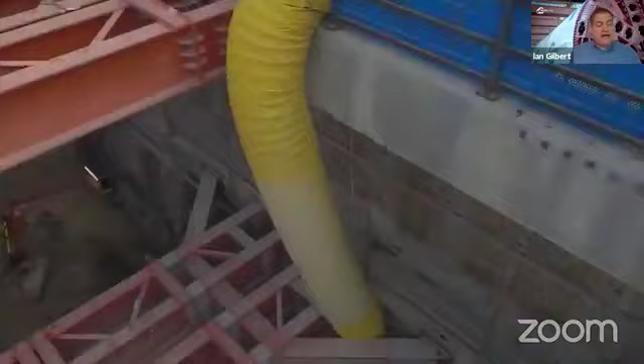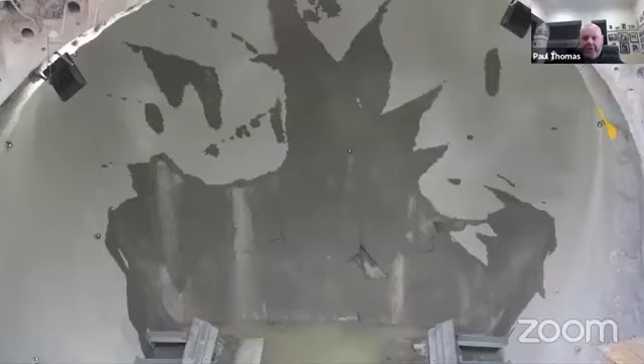So Paul, we've got some great footage of these breakthroughs that I've just mentioned, and we're going to try and share that with the viewers. And it'd be great if you could just talk us through what's happening here. This is the South Yarra breakthrough with TBM Millie, named after Millie Peacock, the first female MP in the Victorian Parliament. So tell us what's happening here. So yeah, we can see the TBM breaking through at the eastern portal down at South Yarra, and what you can see in front of you here is a bit of a time lapse.

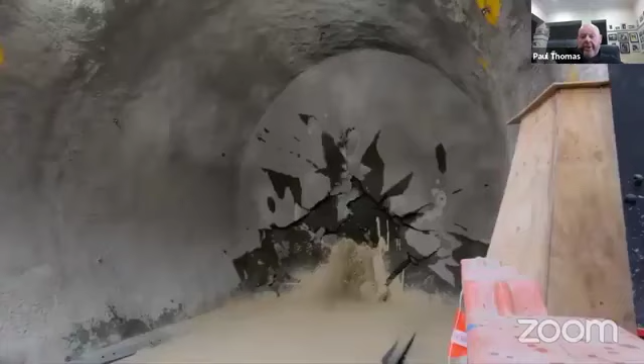But then you can see the liquid coming from what we call a stub tunnel. The stub tunnel is basically a reception chamber to allow the TBM to come through in a safe and controlled manner. Also at South Yarra, we got some shallow ground and a bit of a mixed ground condition. So this provides some additional support to the surrounding infrastructure. You can see at the top of the stub tunnel some round tubes, which we call canopy tubes, which provide an umbrella support, again, to help provide some initial support to the excavation.

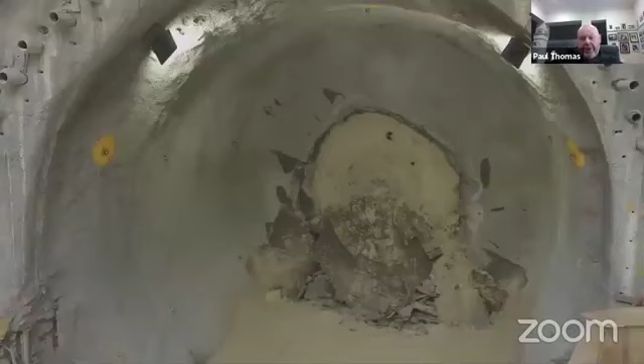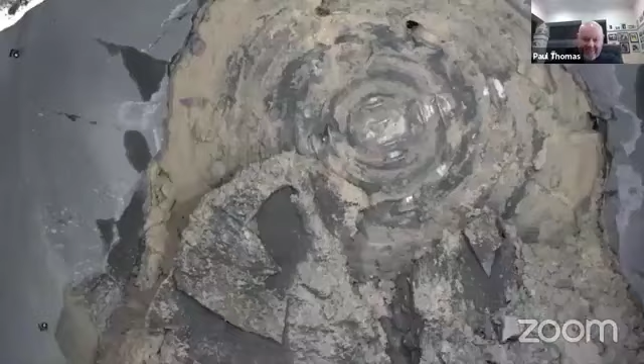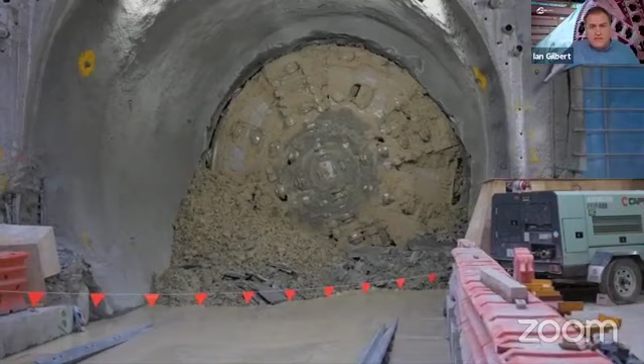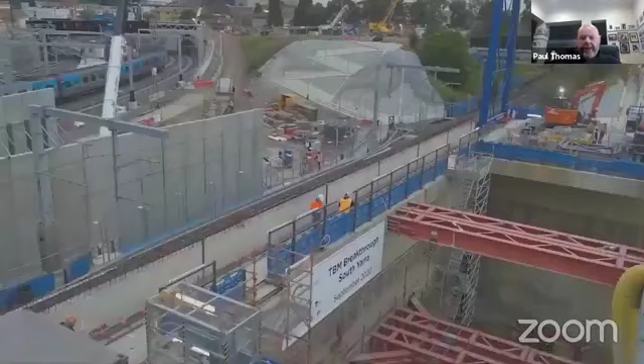Paul, I'm just going to jump in there. Tell us what it's like when you're actually down the shaft looking at one of these things. You know, is it incredibly noisy? Is it hot? Is the steam coming off the TBM? Not quite like that, Ian. It's a controlled environment. So again, you probably notice in the shaft there's lots of pipe work within the shaft. That provides ventilation for the crews working within the shaft. There's plenty of light in, so the atmospheric conditions are quite favorable.

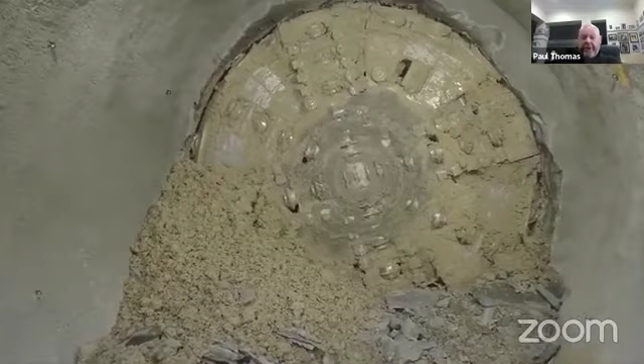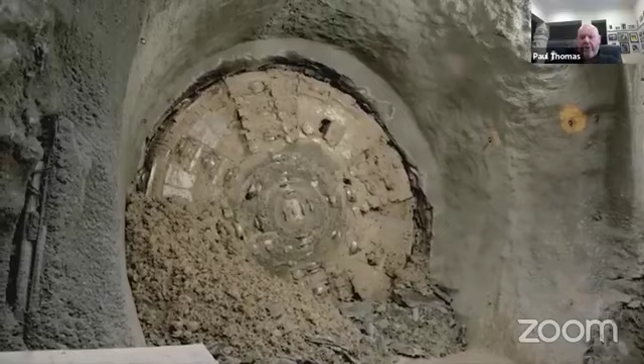Obviously, there's a bit of liquid you can see there, which is the slurry fluid that's used in a slurry machine that comes through. These are pressurized machines, but the pressure is lowered as you break through. And of course, as it's cutting through concrete piles and shotcrete, there is some noise associated with that, and there's some vibration associated with that as well. But nothing untoward that's really noticeable.

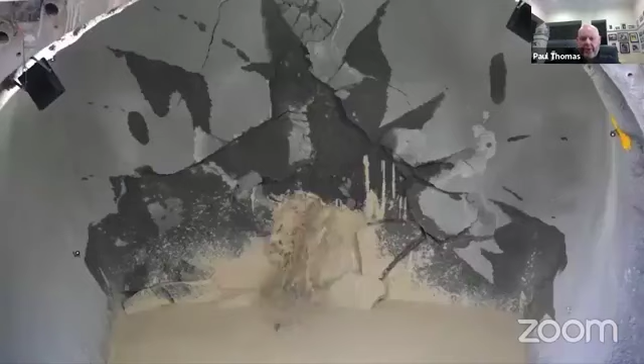So this will be the key point you can see in the picture here, just as it starts to push through. And the crews give that TBM the final push just as the shotcrete comes down, and so it's a bit like ice cracking. Once you've got the ice starting to crack, the rest follows on with a lesser effort, so to speak.

Okay, now Paul, I think I might just try and stop the video there, because we're starting to get plenty of questions coming through, and we can come back to some of that footage. I'm going to tie two questions up here. What's the biggest challenge that's faced on the Metro Tunnel with the tunnelling? And that's from Brendan Elliott. And then we have another one from Damien Coop. Has there been any blasting needed on this project, or is it all done with road headers and TBMs?

Two very good questions. So in answer to the first question, there's significant challenges on a day-to-day basis. The success of this project, of course, involves the TBMs, it involves road headers, but it involves logistics. This is a logistical challenge. It's a wide geographical spread of the project, 9 kilometers end to end, 5 stations. So the logistics and the support involved in servicing the works is very, very important, considering we're in the CBDs and other urban conurbations.

The second challenge is obviously ground conditions. Here in Melbourne, we do face variable ground conditions, and I think down at the Yarra River is probably the more challenging of ground conditions, as we tunnel underneath the Yarra River and Princes Bridge, which is the last of our tunnel drives. And here under the river, in approximately 550 meters of the last tunneling drives, we probably encounter about 7 different geotechnical interfaces. Interfaces meaning it comprises of softer soils, hard rocks, boulder material, sandy material.

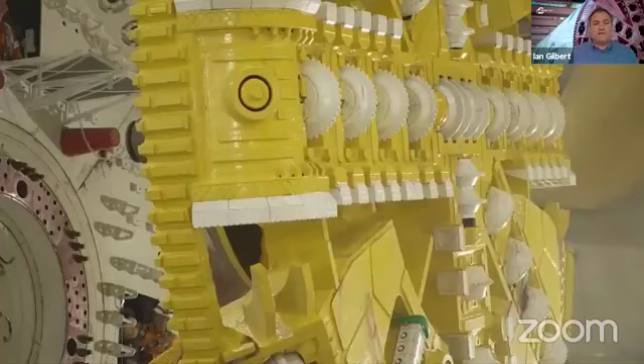It's an excellent question here from Gary Buck. Do the TBMs change directions, the cutter heads, clockwise or counterclockwise? And by the way, the cutter head is that thing you can see behind me on this virtual background for the viewers. The cutter head is the business end. So do they go clockwise and anti-clockwise? They can be bidirectional, that's correct, yeah. So both ways the TBM head can rotate.

And is there a reason for that, to stop them getting stuck or something like that? There's various reasons. One is to make sure that it's even in terms of cutting. The cutter wheels are not in your picture behind, but it does allow the cutter wheels to rotate in different directions, which helps with wear and tear also.

Okay, excellent. Now, a question from Brian Lewis. How consistent has the geology been? You touched on that just now.

But you might want to elaborate on that, particularly the Melbourne formation, for those who aren't familiar with such a thing. So from Brian Lewis, how consistent has the geology been, and found anything unexpected? Oh, excellent question. So look, I'm pleased to say that we haven't really found anything unexpected yet, just bearing in mind that we're only 50% of the way through. And what's been really

encouraging from my point of view is the very early geotechnical investigation works we've done, meaning that we put some vertical drills in the ground at periodic spacings and checked the ground conditions along the alignment. And in particular, we were very interested in the Melbourne formation near the Yarra River, where we expected to find some fault and dike zones. In other words, areas that would be comprised of softer and more permeable material where water might have been a

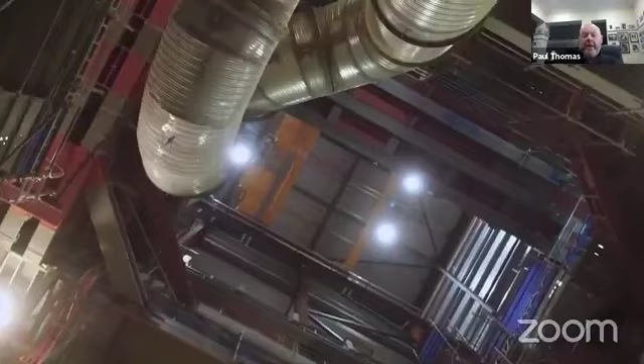In other words, we thought they would be a much poorer geotechnical matrix. We thought they might be more weathered, but as a matter of fact, they've been more cohesive, so to speak. It's been a much tighter matrix, which has meant that from a ground support point of view and from an excavation point of view, that's been more favorable for us.

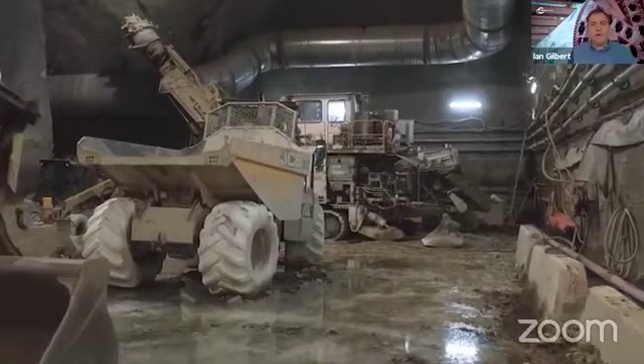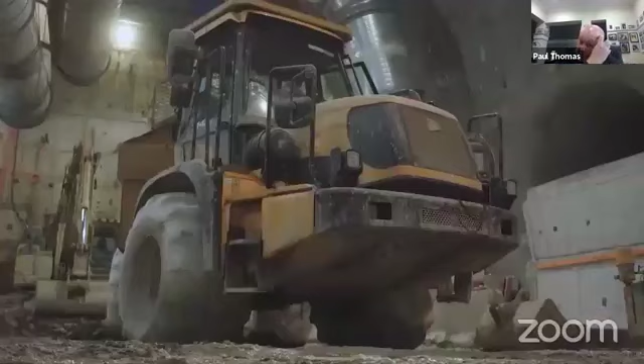Okay, and Paul, we've got some footage here. You might be able to talk us through what we're seeing here in one of the caverns. Yep, so that's good timing. So we are underground here at one of the CBD caverns. I think this is actually CBD North. And we can see in the picture here at the back, there's a shaft. This is actually at CBD South, sorry.

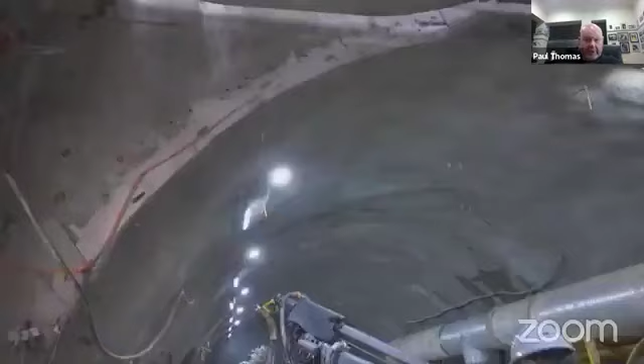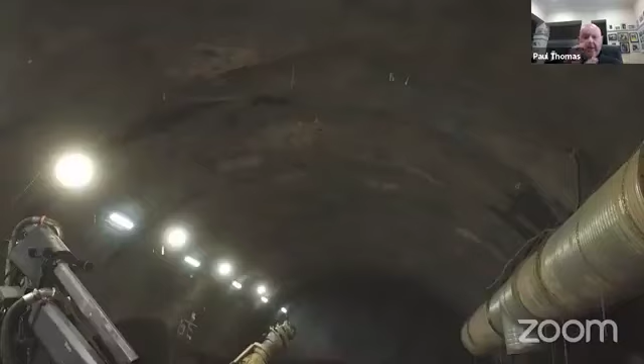So this is the road header here, and these weigh about 100 ton plus, and that's what we use for the excavation works. You can see the rock bolting rig there. And again, in the background, you can see excavators, again, another rock bolting rig. There's the cutter head on the road header there, which actually cuts and mills away at the rock. And you can see the arch profiles there of the caverns and the adit.

So this is the central part. This is actually an adit going towards Federation Square and underneath Swanston Street and Flinders Street. So again, yeah, sorry, Ian, go on. No, so to clarify, the road headers are being used for those caverns, those station caverns. That's right. In the CBD for what will be State Library Station and Town Hall Station. That's correct, Ian, yes. And then the TBMs for our twin 9-kilometre tunnels.

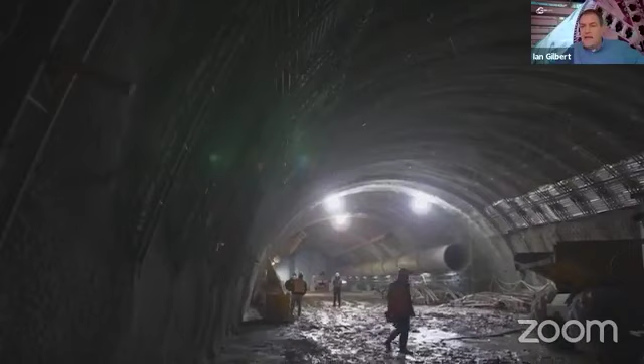And we've had a great question from Denzel Whitfield. What will we do with the TBMs when they're finished? Oh yes, good question. So look, with the TBMs, nowadays there's obviously a great deal of focus on sustainability and reuse, which is obviously a very good thing.

So in the case of Metro Tunnel, and if you look at the picture behind Ian, the white steel rings there are what we refer to as the TBM shield. So all the workings of the TBMs are contained within those shields there. When the TBMs arrive and conclude their excavation works at the CBD station, CBD South, Town Hall area, the shields themselves are left in, and we call these sacrificial shields, and they stay in place, and eventually they are cast in concrete and form part of the permanent works ultimately.

But the other components, such as the cutter head, the cutter wheels, and all the hydraulic motors, for instance, the segment erector, the refuge chambers that are on the TBMs, these are more likely to get repurposed and reused on other TBMs. So our supplier Herrenknecht has a very good strategy in place to reuse and refurbish as much of the material as possible. So they do buy back a lot of these elements.

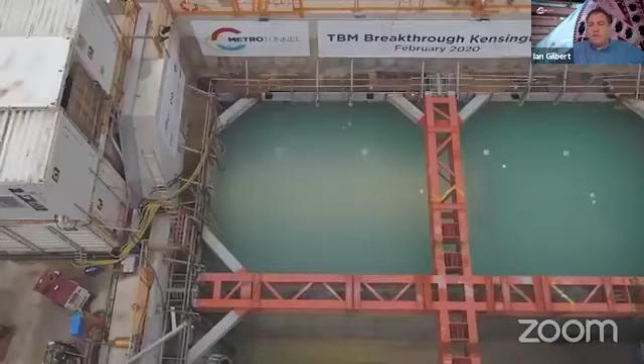Excellent, excellent. Now, I think we've got some good footage of one of our TBMs breaking through at Kensington, where we had to break through into a water chamber. We'll try and get that footage up while we just answer a couple more of these questions, because we're sort of sticking with the TBM and the business end of TBMs at the moment. Simon Mullins asks, do those cutter heads need sharpening after a run?

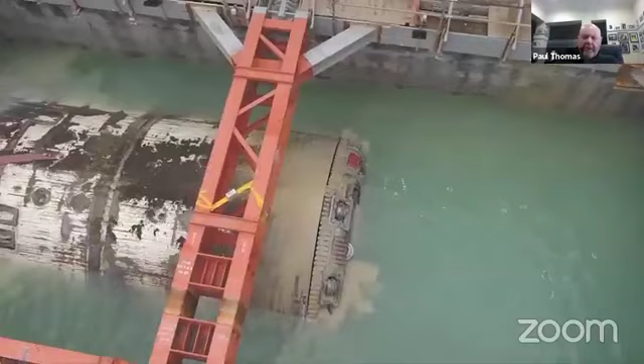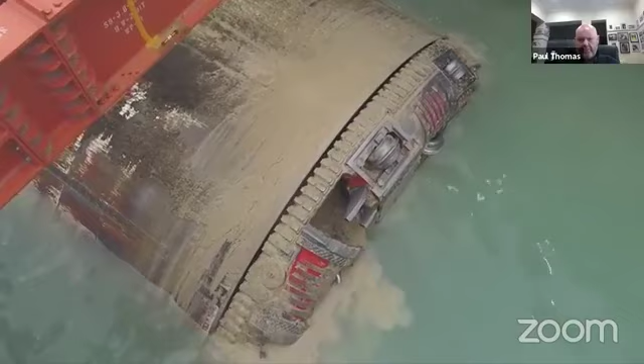No, the cutter heads don't, but the cutter tools, and again, we refer to them as cutter rings, they do get regularly replaced. So it's a bit like, I suppose, wheels on a car. They get put in different locations. And if you can see the picture here, you can see the cutter rings there, which are square shaped, and they've got the rings there. So these tools can be replaced, and they are replaced.

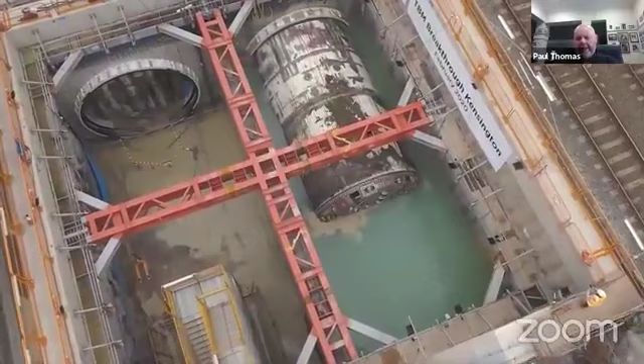They're taken out from the back of the cutter head within the shield, and the cutter rings and the cutter bearings do often get replaced depending on wear and tear, but the cutter head itself generally is okay. Once it's achieved a breakthrough, obviously there's an inspection, and if any what we call hard facing is required to the cutter head itself to patch up any areas, so to speak, then that maintenance is undertaken.

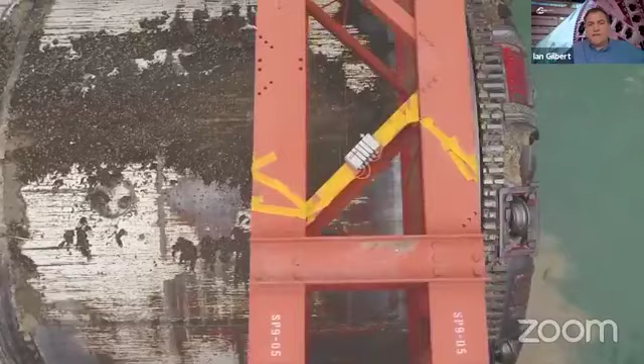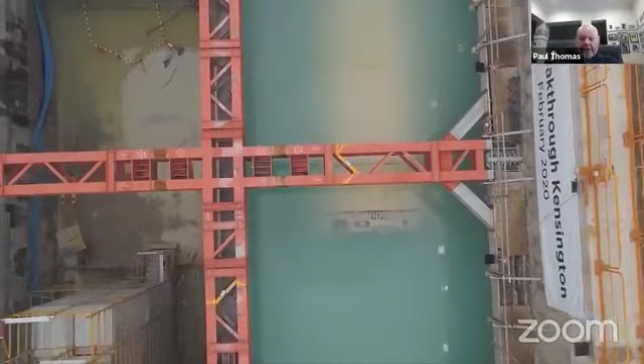And can you explain to us why that TBM was coming through into a water-filled shaft that we can see here? Yeah, good question, Ian. So if we just cast our minds back to about 10 minutes ago, where we saw the eastern portal shaft, which was a dry shaft, no water in the shaft. There's two differences between the western portal and the eastern portal. Here we are very close to existing rail infrastructure, and there's also some services close to this shaft.

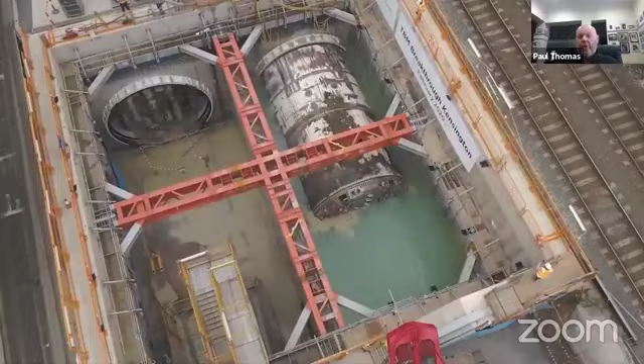Normally, instead of filling a shaft with water, you can provide ground treatment to the external of the shaft. So you provide a ground treated zone, so to speak, for the TBM to dock into, and then finally breaking into a shaft. And that means that the ground and the groundwater table is not compromised outside the shaft.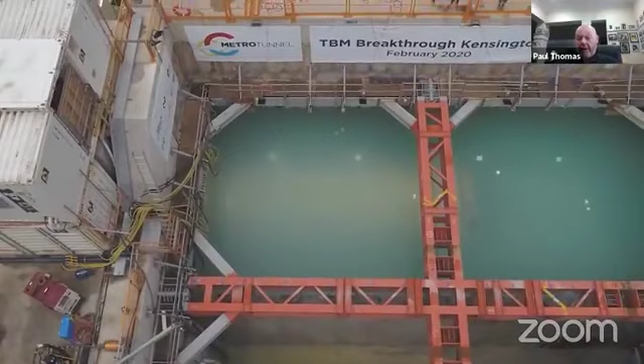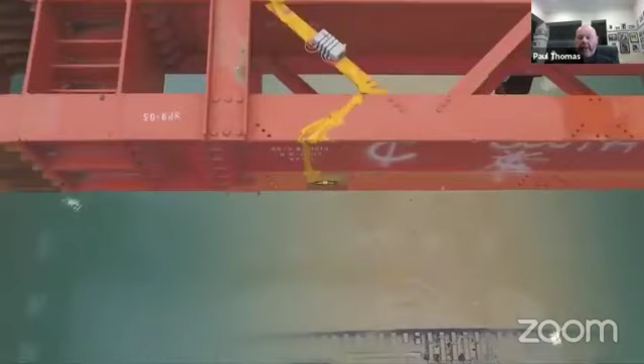However, in the case of the western portal shaft, due to space, there wasn't an opportunity to perform ground treatment. So in order to maintain the equilibrium of the groundwater outside, we fill the shaft full of water, so it maintains the balance. If the groundwater was to be drawn down, that could have ended up in some surface settlement, which we don't really want. So again, it's balancing the groundwater levels in this area to a great deal of success.

All right, we've got another question. What are the cutter heads made of? Diamonds? Presumably it's got to be something pretty hard. Yeah, no, Herrenknecht, our supplier, generally keeps this a secret in terms of what the composition is, but I've been fortunate enough to visit Herrenknecht's factory in Schwanau in Germany, where they make the bearings and the cutter heads. So it's a very, very hard, robust material, and certainly can stand the wear and tear of very hard rock conditions, as well as the cutter tools. The composition of the cutter tools is very, very important. But it's a trade secret, right? So there's your answer. It's a trade secret, yeah.

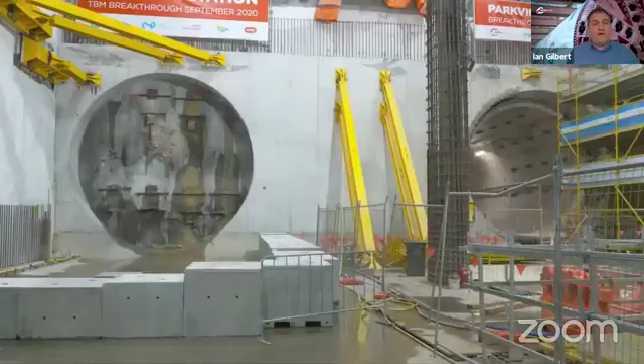So I think we've got some more TBM footage, because it seems like we've got a lot of interest in the business end of these TBMs. So we might be able to get up some footage of TBM Meg breaking through at Parkville. All five are very important stations for us, but Parkville obviously opens up that whole medicine, education and research precinct when the Metro Tunnel finishes in 2025. So a lot of focus on Parkville. Paul, tell us what's happening at this one.

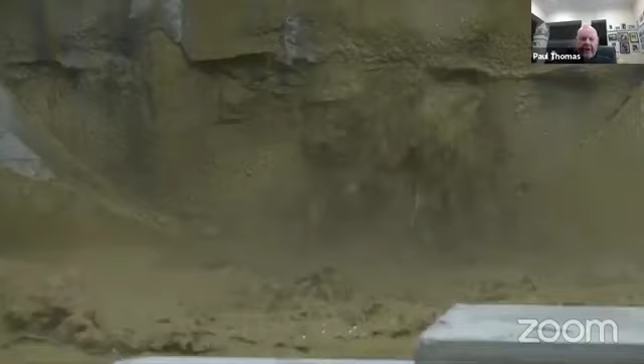So again, what we can see here is a breakthrough that's similar to the Eastern Portal, except we don't have any reception chamber. It's not required. Parkville itself and the surrounding environment has got very good rock conditions. We don't have any prevailing groundwater issues, meaning that we can allow the groundwater to drain in, so to speak, because there's no softer compressible material at the surface.

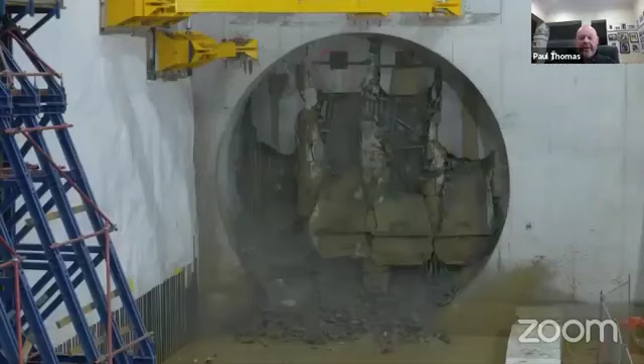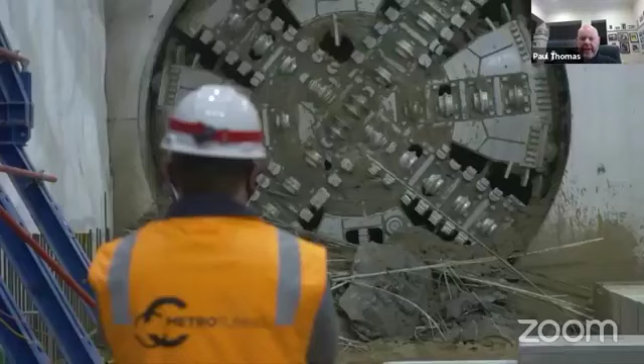And that's a good shot, because you can just see the TBM breaking through the bored piles, which we use to form the outside of the box. And that is not steel reinforcement, that is glass fiber reinforcement. The reason we use glass fiber reinforcement is that the steel could cause damage to the cutter head and the slurry pumps. So with glass fiber, it's easily cut and chomped away, so to speak.

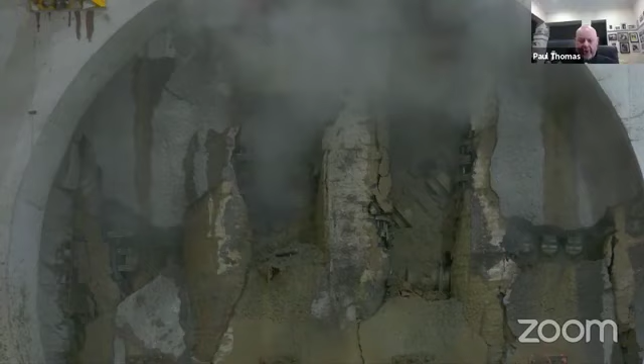The yellow steel section you can see there is akin to strutting. That provides lateral restraint against the head wall there, because the TBM at this stage is pushing quite hard to cut through the bored piles and the shotcrete there. Probably pushing at about 1,500 to 2,000 tons. So there's a lot of force, a lot of energy being applied here to break through the wall. Could you compare that to anything? The force you're talking about, can you put that into layman's terms?

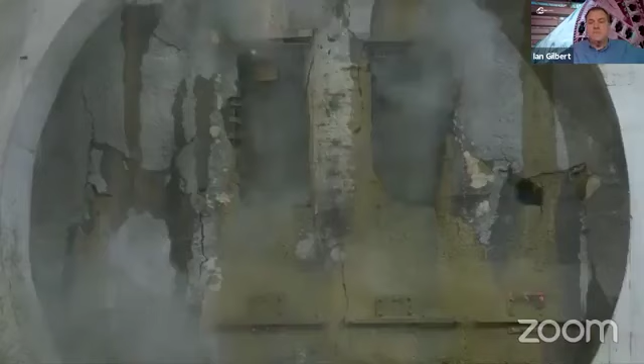Maybe trying to, well, trying to pull or push a couple of 747s. I'll put you on the spot there. You called me out.

Now, how often do the cutter heads need to be changed? asks Brendan Elliott. The cutter heads themselves don't have to be changed unless there is a major problem during the tunneling works, which is a low risk. But again, as I said, the cutter tools themselves, as we've seen, that are affixed on the cutter head, the round turning tools, get changed periodically at maintenance points. So again, that's the most common item that gets replaced and rechanged.

Okay. Now we've got a question about the tunnel itself as opposed to the tunnel boring machine. Ethan Rosario has asked, what carries the concrete tunnel lining in the TBM? So obviously those TBMs, they go through, they dig out the tunnel, but then they line the tunnel as they go to create the finished tunnel. Correct. How do those huge bits of concrete get out there?

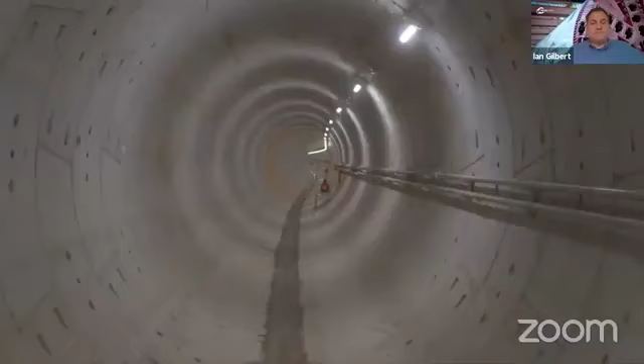Right, well, this is a good video, and I've also got a TBM model here I might refer to. But this is the tunnel here where obviously the segments have been installed and the TBMs have been taken away, and also all the TBM services have been taken away. So this is not quite the finished product. There's still cross passages and first stage concrete to be installed.

But in order to get the segments to the TBM while it's building the tunnel, we use what are called MSVs, which are multi-service vehicles, which are rubber-tired vehicles. They can drive in and they can drive out. So there's drivers' cabs front and rear of the MSVs, and they basically bring the segments up to the TBM.

And if I refer to my little model here, this model is an EPB, it's not a slurry machine, but this is where the segments will be installed in this area. This is what we call the ring build area here. And if you can just see my model, there's some segments here which have been delivered. So the MSV would come up.

There's a gantry crane then on the back of the TBMs, which actually lifts the segments which form the ring, brings them into the ring build area, and they're moved along here by a gantry system into the segment ring build area, where they'd install them within what we call the tail skin of the TBM. Then once that full segment ring is installed, the TBM pushes off there and recommences the cycle.

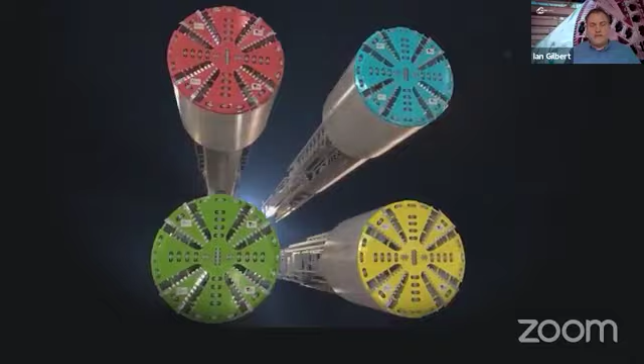Okay, excellent. Now we've had a few questions about cross passages. So I'm just saying that so our video supremo can get that ready. Oh, there you go. Speak and it shall be done.

Now, Paul, tell us about what a cross passage is. We're getting some questions about what exactly that is. Okay, well, the cross passage, in very simple terms, connects both parallel tunnels together. The purpose of the cross passages is to provide emergency egress and access during the operational phase, in the event that something occurs within the tunnel. If the train was to break down or passengers need to evacuate safely, they can be directed from the train onto a walkway to the nearest cross passage.

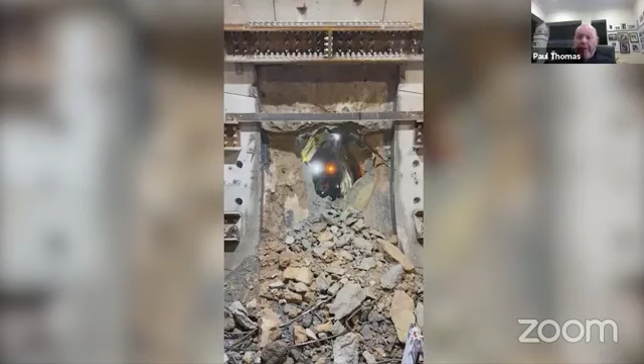Now, the cross passages here are spaced every 244 meters. And not only do they provide emergency access and egress, but they also house some of the key communications equipment required to operate the trains, such as telecommunication equipment. Some of the cross passages, I think we've got 3 or 4, have sump pits. So there's small pump stations, so to speak, within the cross passages.

So we've got water running through. For instance, if there was a water ingress into the tunnel for whatever reason, the low point of the tunnel where the cross passage is has a deep sump pit, and that pump will pump the water out of the tunnel. So there's a number of uses for the cross passage.

Got you. Our next question, I would say this viewer is very much an engineer. Alexander Ilievsky: how do you get the TBM precisely lined up with the recessed diameter in the tympanum wall when they break through? Oh, okay, that is a good question. So there is quite a sophisticated guidance system used for the design tunnel alignment. The TBM guidance system is controlled by automatic theodolite stations and laser beams, which help keep it on the true trajectory, both vertical and horizontal curves.

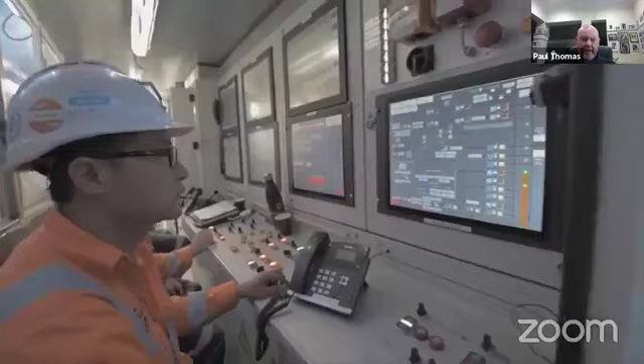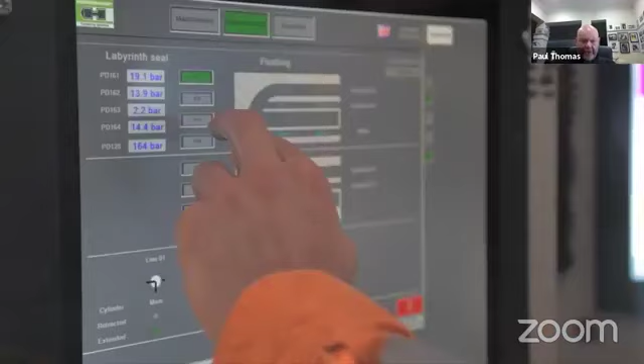And as each advance is achieved, there is continuous monitoring of the alignment of the TBM. Now, the TBM can waver every now and again, and I think we've got tolerances of plus or minus 50 millimeters. So this is a good shot. You can see inside the control cabin, and that top screen there is where the TBM operator can actually see in real time how the TBM is advancing forward in terms of vertical and horizontal alignment. So he can control the alignment very accurately from within the control cabin.

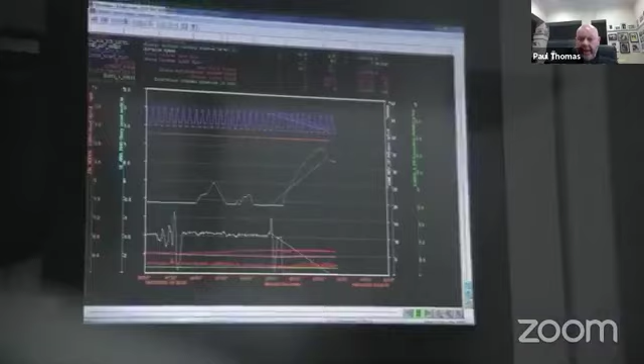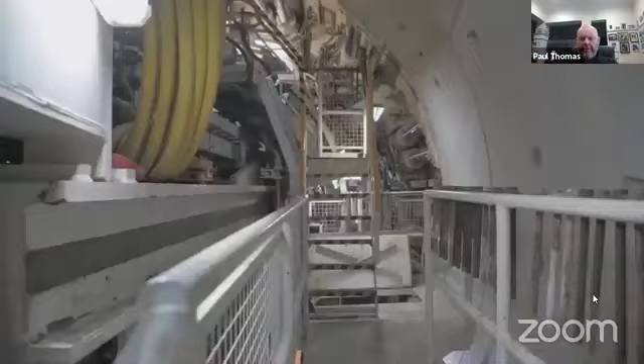And there we are. I'm sure that's the guidance system there. Yep, where you can see the alignment of the TBM. And this is where you can see the vertical curve going through the geology there. So again, it's quite a precise way of control, very high degree of accuracy that's achieved in terms of the tunnel alignment.

And I should just point out, for those joining us on Facebook, some of the footage was captured well before coronavirus hit. So if you're wondering why some of those workers aren't wearing face masks or they're not socially distancing, it's pre-COVID times, and I can assure you that work is continuing on Metro Tunnel with all due regard to safety, and we've got all the correct procedures in place. So workers' health is obviously very, very paramount.

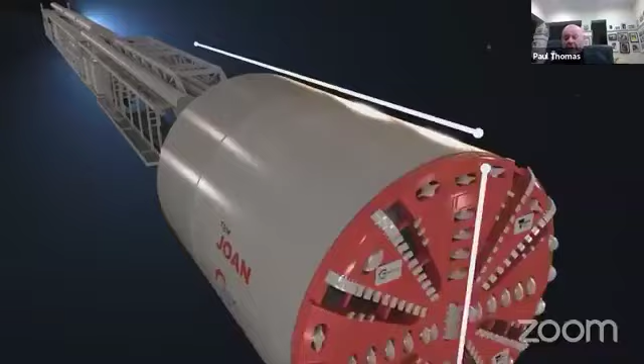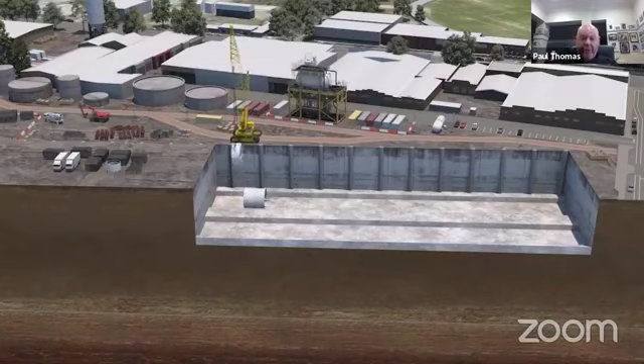We've got what we call backup gantries here. And there's several of these on our TBMs underground at the moment. So again, about 100 meters. Right on the back of gantry number 7 is a toilet where the crew can go and use those facilities. The reason why it's at the back of the TBM, on the back of the gantry, there's a small crane that can help lift it in place and take it away, so that it's serviced properly, so that it can be clean at all possible times. So yes, we do have good welfare facilities underground.

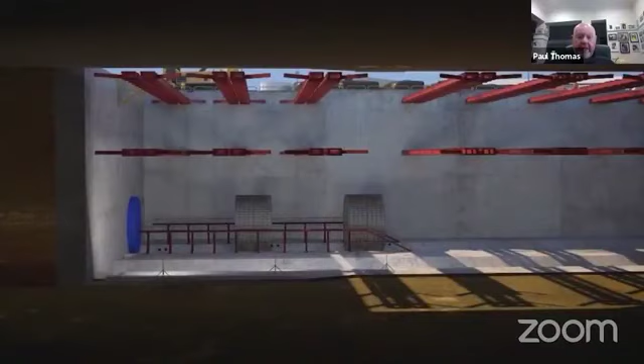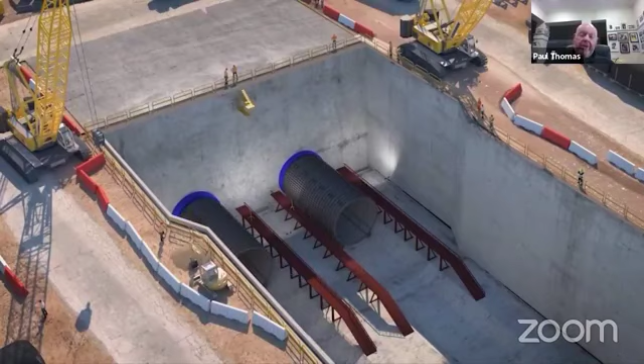And you know, tunneling, again, explosives, hard rock was used, but the history of the TBM has come leaps and bounds since the 60s and the 70s, where we rely more on sophisticated methods, particularly in softer ground conditions, to what we see now and what we use now, which are the slurry machines and the earth pressure balance machines, which allow us to have a much greater degree of control on ground displacement, ground settlement, and groundwater behavior. So that means that we're not dealing with uncontrolled excavation phases.

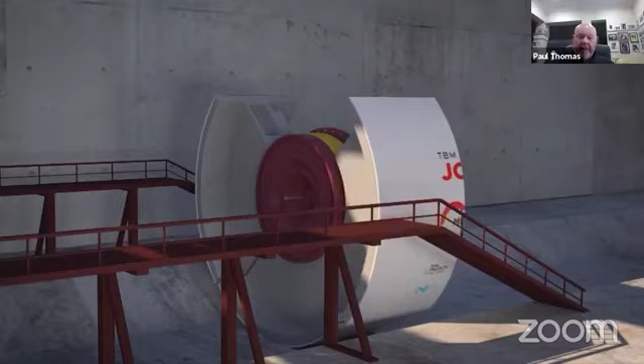The groundwater and the ground can be controlled. So long as that's controlled, it means that everything above ground and in the immediate vicinity remains safe and stable. So again, the modern day tunneling techniques are very safe. They're very efficient. Incidents around the world do occur, and unfortunately, I've been involved in a few incidents. Things can go wrong. But nowadays, with the technology, with the controls, it's a very safe, efficient method of tunneling.

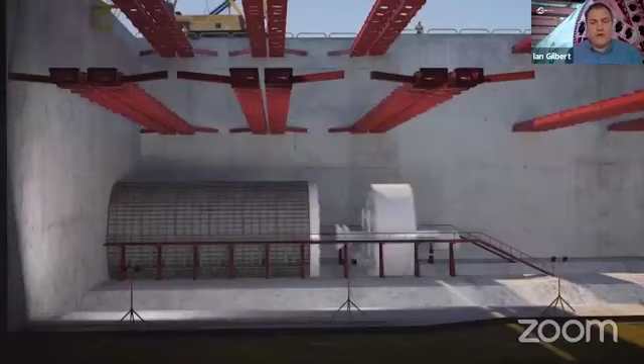Now, I've got a question here for you, Paul. What's the most unusual challenge you've ever had on a tunneling job? Okay, back about 20 years ago, after I'd finished one of the projects in Singapore, I used to work for a Japanese company called Kumagai Gumi. Anyway, cut a long story short, we were awarded a tunneling metro project in New Delhi, not too dissimilar to Melbourne Metro. We had 4 or 5 stations plus a depot line, hard rock, soft soils, quite similar in terms of challenges. So again, we had a lot of sensitive structures around the area, including universities, including elevated structures.

But also we were tunneling and constructing stations close to the rock garden. Anybody familiar with New Delhi towards the north end of the city will know that there's a massive rock garden, trees, rocks and everything else, but monkeys live there, quite a lot of monkeys. And they can be a bit of a nuisance, but culturally, they're very, very important. And they used to like to swim in our bentonite pools because the bentonite was cool while it's being mixed, within 40-degree temperatures. And so one morning I get a call from one of our staff to come quickly to one of the sites.

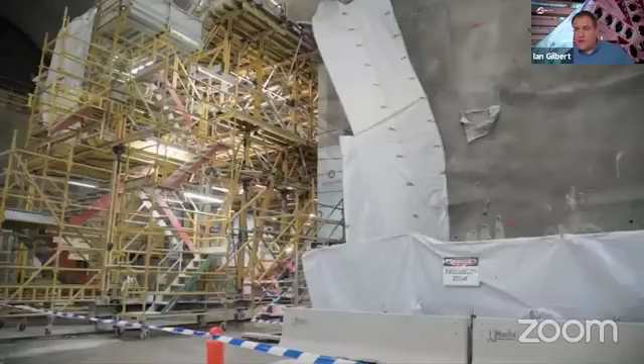Okay, I'm just going to see if Murphy, our video guy, can get some footage up of the State Library, and we want to just talk to that a little bit. In the meantime, Ben Cole DeWitt, is there a predefined route for TBMs, or do you manually steer them?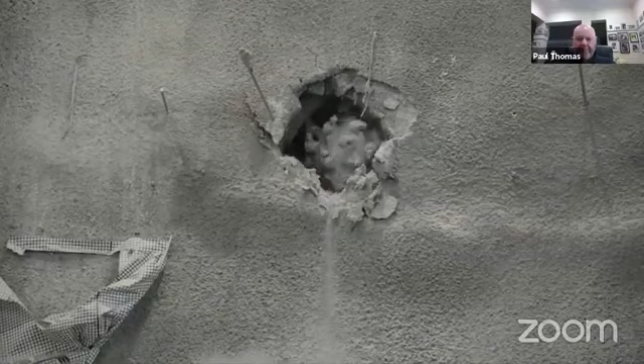No, there's a predefined route. So part of the guidance system involves the coordinates of the horizontal alignment being fed in, as well as the elevations for the vertical curve. So again, it's a predefined alignment. All the coordinates are calculated ahead and fed into the guidance system to make sure that the TBM stays on path.

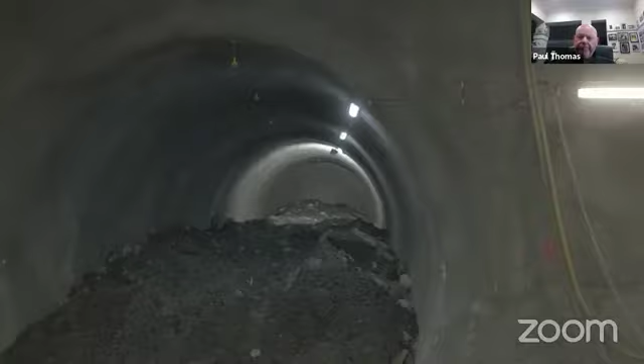Okay, we've had a question specific to State Library, and this is the State Library cavern that we're looking at now. Is there any impact on historical documents and collections underneath the State Library site? Oh, I'm not aware of any at all. No, I think, just to clarify for people, you're tunneling that far below. The whole point is to keep well away from structural foundations.

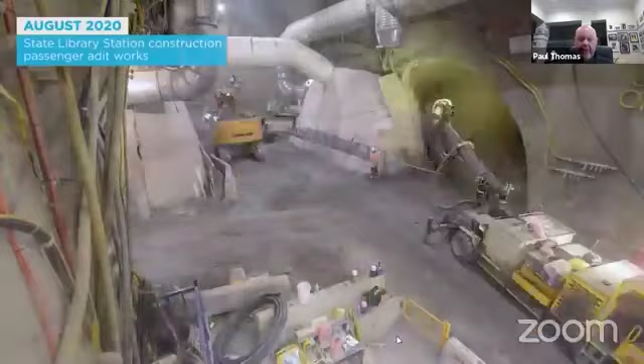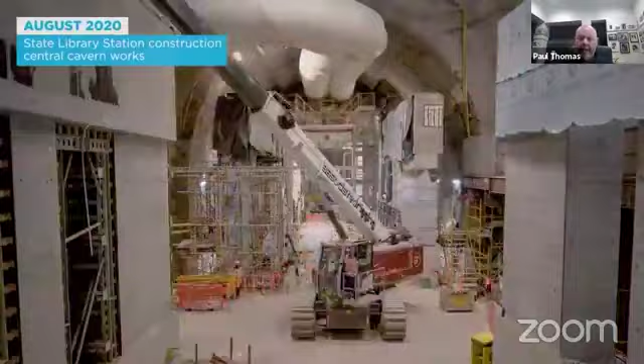Yeah. So look, I'll provide a bit of context there. So we positioned the underground cavern at CBD North and CBD South. So it's mainly under Swanston Street. But what we've done during design development and what CYP have done is we take into account the existing infrastructure, what the foundations are, and what's within the zone of influence, and we can actually run numerical modeling that will predict the behavior of any historical structures, buildings, or infrastructure. And we satisfy ourselves that these are okay. There's not going to be any compromise to the structural integrity.

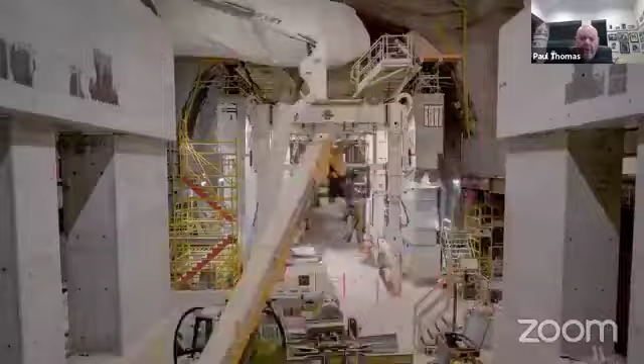And as we construct the caverns, like what we can see here now, we heavily monitor the works, including all the concrete works you can see going on here, plus the cavern arch you see here where we've excavated. So in real time, we continue to monitor the behavior of the underground structure, as well as the above ground structures that are within the immediate vicinity of the works. And it's worth pointing out that these are engineering hurdles that are overcome in sites around the world. London Crossrail, Singapore, New Delhi Underground, hence bringing in people with experience like yourself.

But Ian, I will say one thing about the Town Hall and the State Library caverns. These are engineering marvels. There's not much of this work that's done throughout the world in terms of what we're seeing going on here. So for instance, that picture there shows the stub tunnels underneath the Metro. The Metro City Loop connection there is just about 1 meter above the crown of those stub tunnels there. So the work that's being undertaken underground here, particularly with these mining caverns, is extraordinary. And again, it's an engineering marvel as far as I'm concerned. Fantastic work, and you won't see much of this around the world. This is very unique. Yeah.

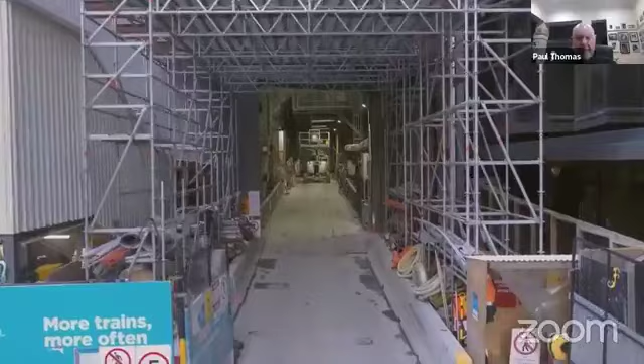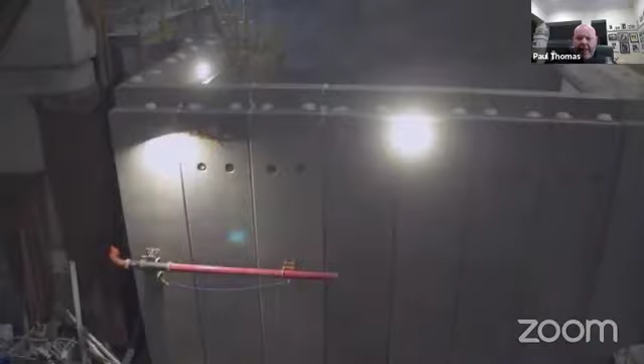I think we're going to have one more question. There's been a few along the lines of what actually drives the TBM cutter heads. What mechanism? So they're electrically powered. There's 5 motors that are installed to what we call a main bearing. So the motors connect to the main bearing, electrically powered. I think the installed power is about 2,000 kilowatts. And then the cutter head is connected to the main bearing. And so the motors turn within the main bearing, and that turns the cutter head, all electrically powered. Great. And that question was from Dara Flannery and several others.